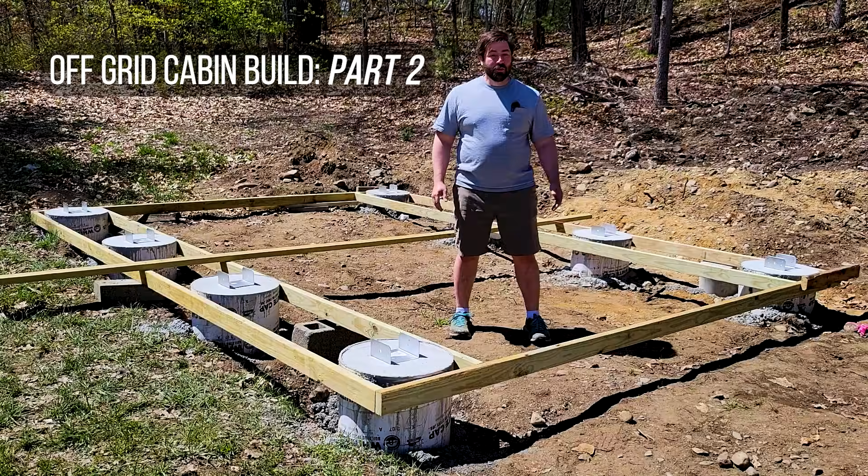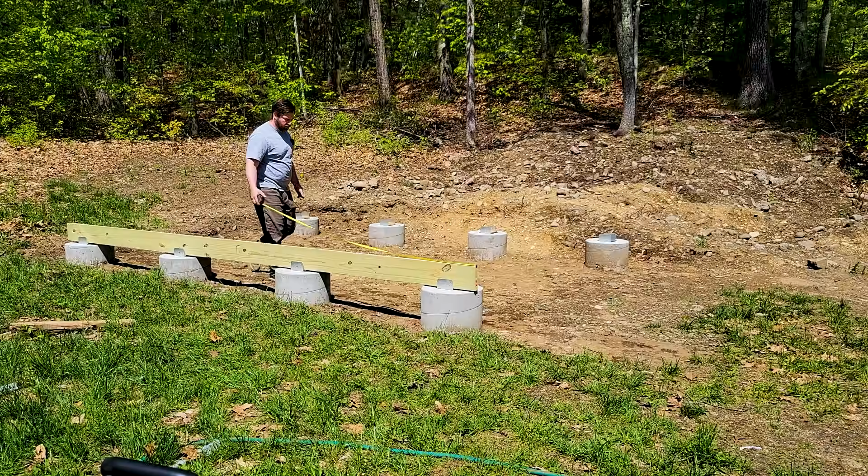Now, in this video, we're going to be talking about beams most importantly. Yes, we'll be stripping the forms, we'll do a little grading, but how do you size the beam to go from footer to footer and span that gap and spread the load between the footers from the weight of the structure? Well, we'll be getting into that in this video. Here we go.

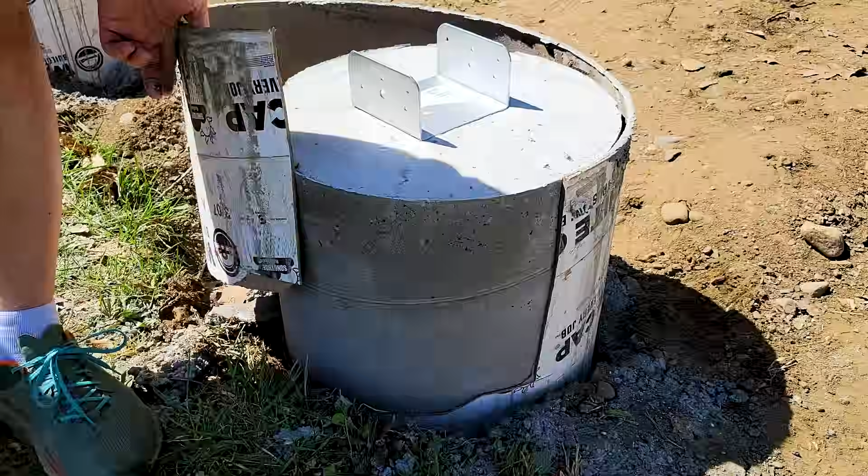First off, I need to strip all these wood forms. I use the wood forms to help me line up and secure the sonotubes while I poured the concrete. I didn't want anything shifting. Now I don't want to leave that sonotube in place, so I'm stripping it off. And then I need to round over the top edge of that so that hopefully I don't have big chunks of concrete breaking off in the future.

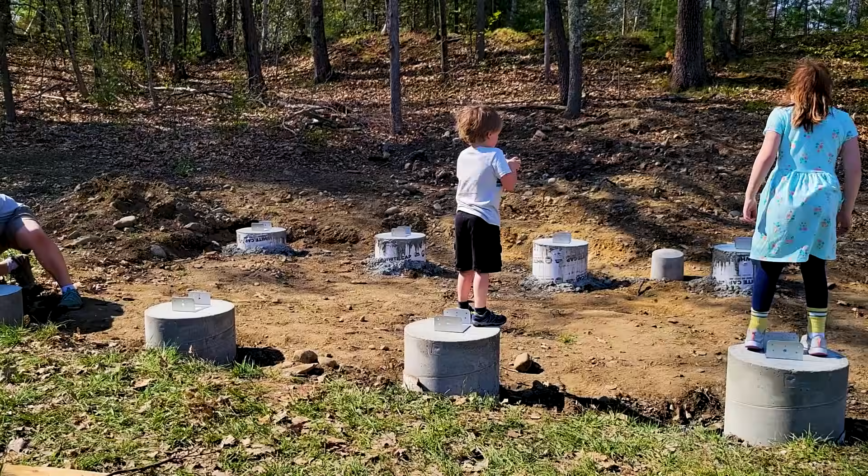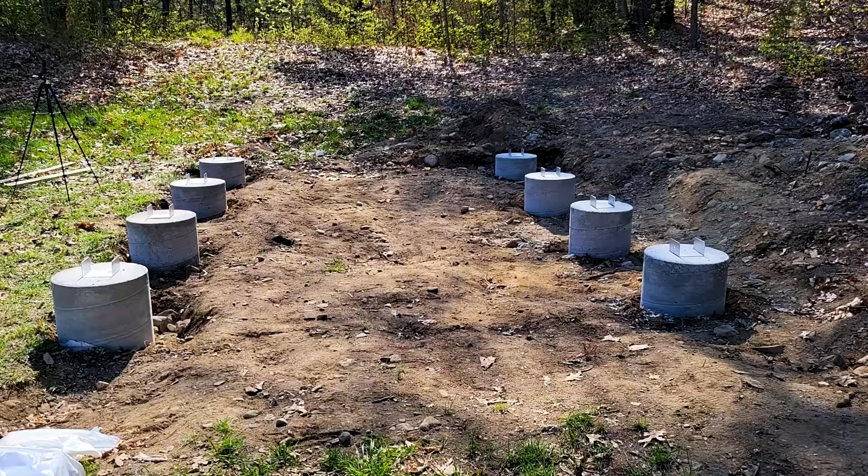And you can see my kids there helping me pick up the big chunks of concrete. I don't want to leave those behind. So I'm going to rent a dumpster at the end of this whole big project to throw all the debris away. And I was pretty satisfied with how the concrete anchors all lined up with each other.

Now my biggest concern with the dirt is that there were some low spots in between all the footers, and I don't want those collecting water over time or having any standing water under the cabin. So I'm spreading out a lot of dirt here. I'm removing the big rocks. At one point I grabbed a big iron bar and was ramming it down next to the concrete.

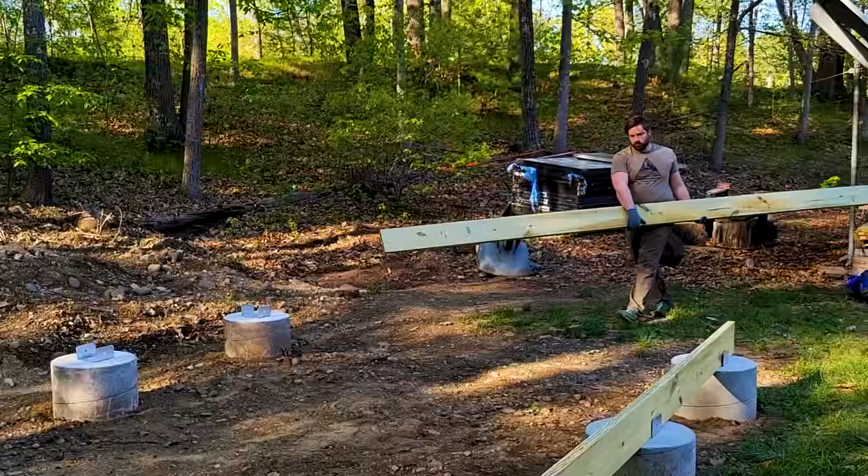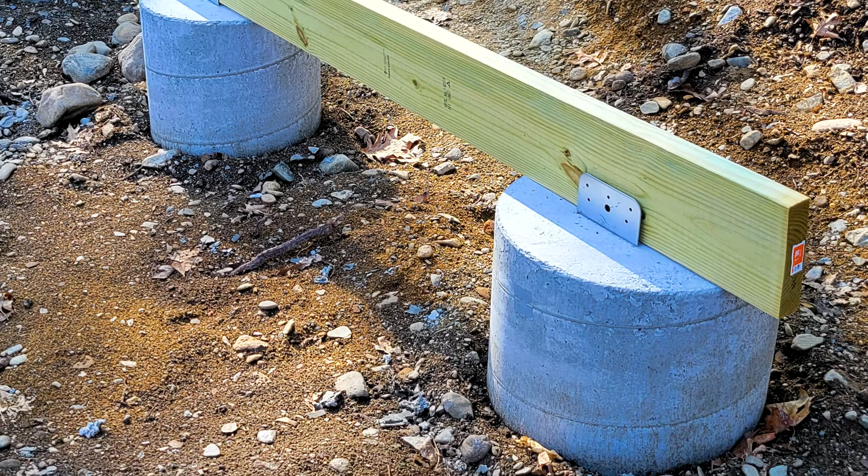Once I was satisfied with that, I got my very first look at how the beams would be positioned. I'm finally at a point where I want to move on to the beams. Now the beam needs to span from one support to the next and take the weight of the structure. Now from one support to the next support, the clear span, not center to center, but the clear span is about 4.33 lineal feet. Let's look at the code.

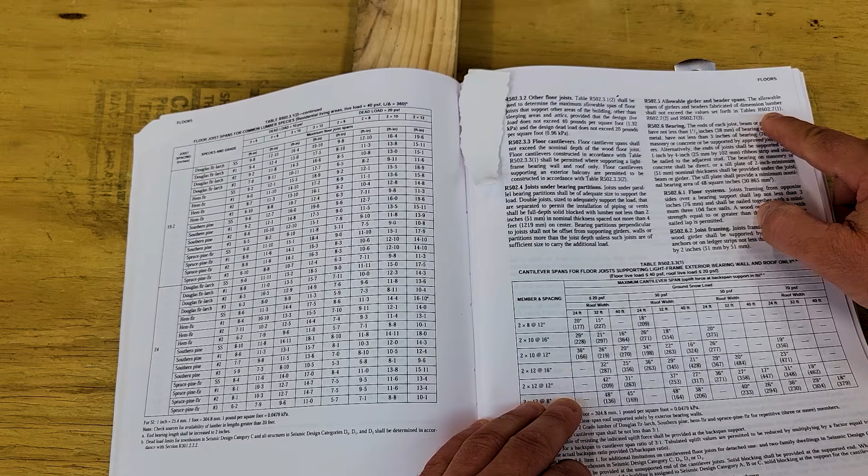First, we're going to look in the chapter for floors because this beam is supporting the floor joists. Now beams supporting floor joists have a special name called girder. And it says right here to refer to chapter 6, specifically tables R602.7. So let's go over here, and that's these tables. And so these can be used for headers in a wall or floor girders for supporting floor joists.

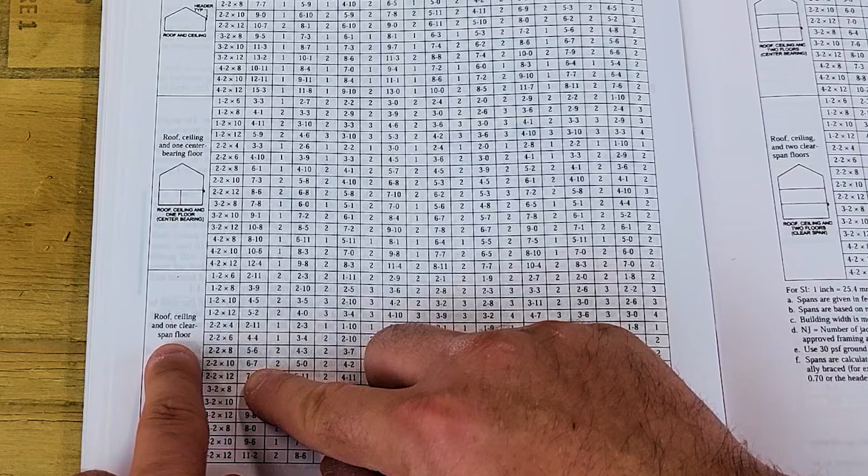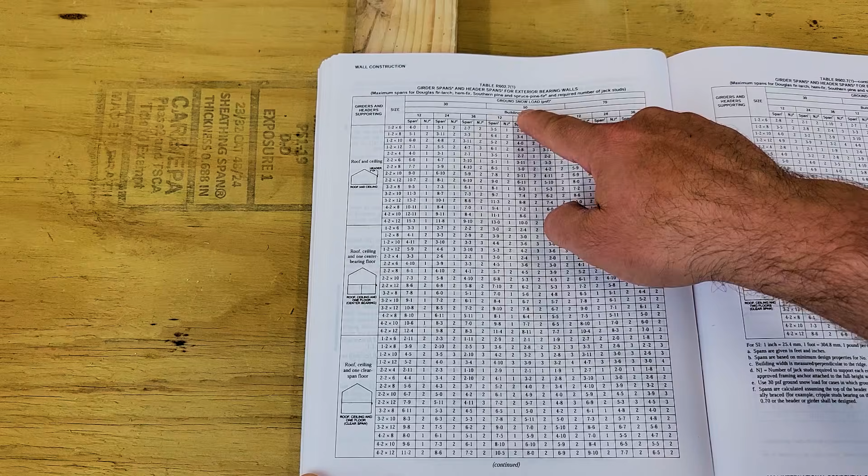On this side, we can see that this represents our situation. It's saying that this girder is going to support a roof, a ceiling, and one clear span floor. Well, that's our situation. At the top, we can see it's broken into 3 big columns based on ground snow load. That's 30 pounds, 50 pounds, and 70 pounds. In my area, it's 40 pound per square foot snow load, but we'll have to bump up and use the 50 pound because there's no 40 pound reference.

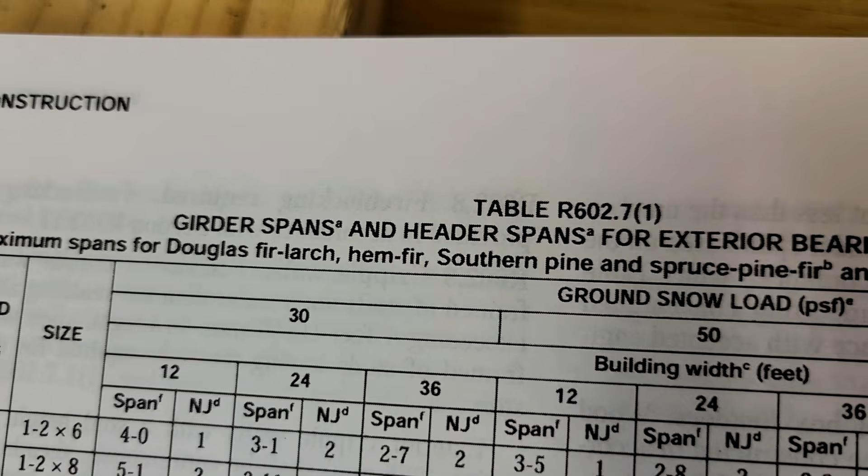Then it says building width. Well, my building is 12 feet and there actually is a 12-foot column. So we're going to use that. Well, it says here span and number of jack studs. Well, we're not actually having jack studs, so all we care about is the span. So we're going to look at this column right next to the ruler. Let's zoom in and get really close here.

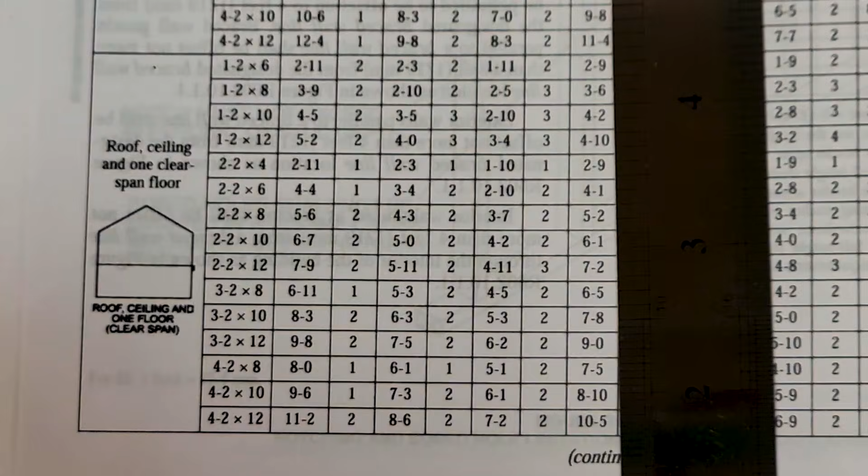The clear span that I have is about 4 feet and 4 inches. So we're going to look in this column here for anything over 4 feet, 4 inches. So you can see a single 2x10 is not strong enough. A single 2x12 is strong enough. It can span it. But that would be really, really tippy. So we keep going down the line.

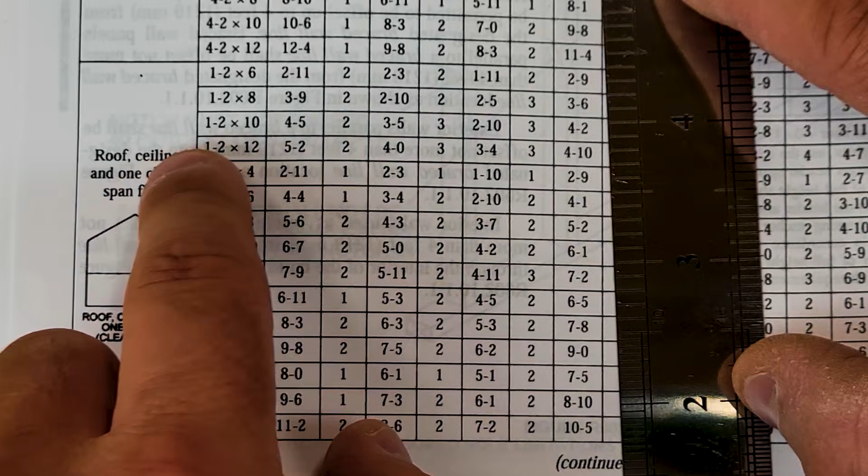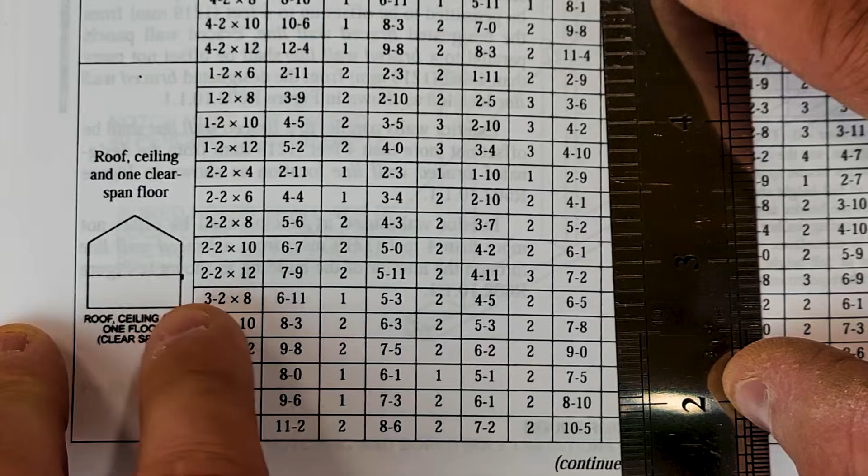And we can see that we could use a double 2x8. But again, I want to fatten that up. So if we go to a triple 2x8 right here, it can span 6 foot 5 inches. So we got plenty of strength. We have plenty of stiffness, so we're not going to have a bouncy floor. And we also have a very stable girder in this case that won't want to tip over.

Now before I can go and nail the beams together, I have to check for level between each footer. Now we did that while we poured the concrete, but things always move a little bit and they're never perfect. So this is my chance to add little shims as needed. So I have a 16-foot long 2x8 pressure treated on both sides.

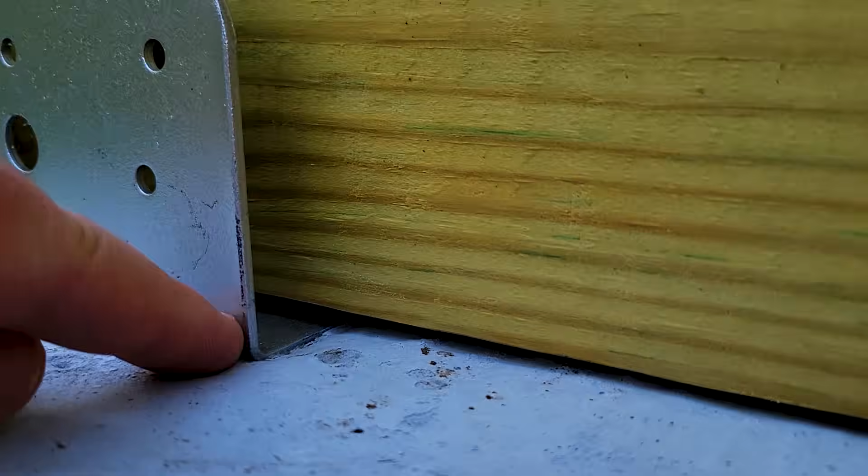And what's interesting is I can see that, for example, this one has contact, but over here, it's still loose. It's not touching that footer. It's nice and straight. And down here, we're not touching the metal. So this thing is actually free floating. It's not touching this footer anywhere, but it is touching this footer. So what I'm going to use in this situation is an asphalt shingle.

I'm going to cut a piece of asphalt shingle as my shim, and I'm actually going to put a piece under all of them, but I'm going to put 2 under this one and 1 here where we already had contact, 2 under this guy, and 1 over here on the far end.

Now that asphalt shingle, it's going to last a very long time. I have been on renovation projects where these things are probably 60 plus years old and still holding up just fine because, you know, they're not exposed to the weather. They're hidden underneath here. If you guys have a better idea of what could be used for a shim in a situation like this, I'm all for it, but that's what I'm going to use.

And I'm using a straight blade here. With asphalt shingles, you really want to use a curved blade, but I'm making do with what I have. So we're talking 5.5 inches, because that's how wide it is. There you go. So that's 1 shim.

There we go. So it looks like it's still not bearing weight, but I can hear it scraping the granulars. So that's the process of going down. That's just 2 shims down, but I'll keep cutting some and adding some to the other side, and we'll see if we can't get this whole thing so that we have some touching going on all the bearing surfaces.

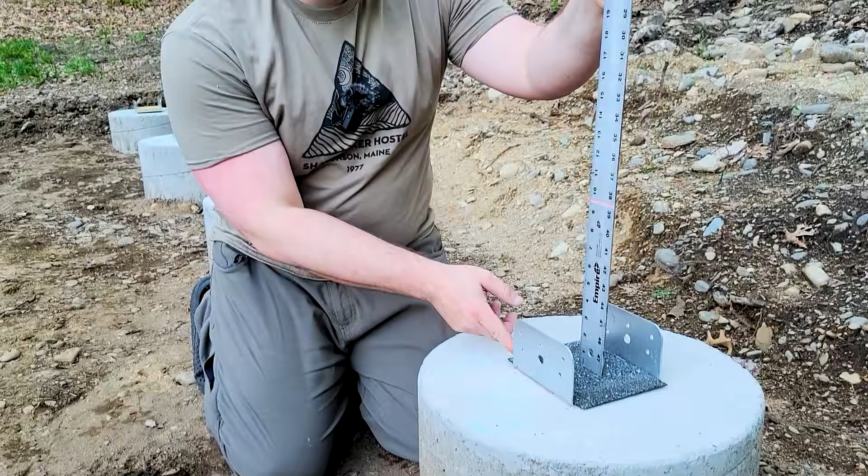But let's go around. I've got them all now shimmed where I think it's as close as I can. I was going for within 1/8 of an inch. This spot right here is showing at 9.5. And I've got 1 shingle in there as my shim. So I was writing down the heights in chalk on the foundation of each one so I could figure out how many shims I need. And you'll see some of them I had to go more than just a single piece of asphalt. So we're looking for 9.5 on the ruler.

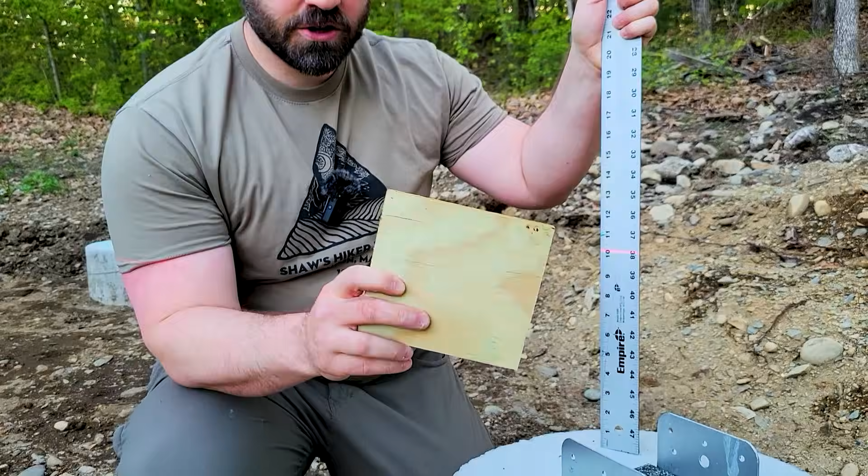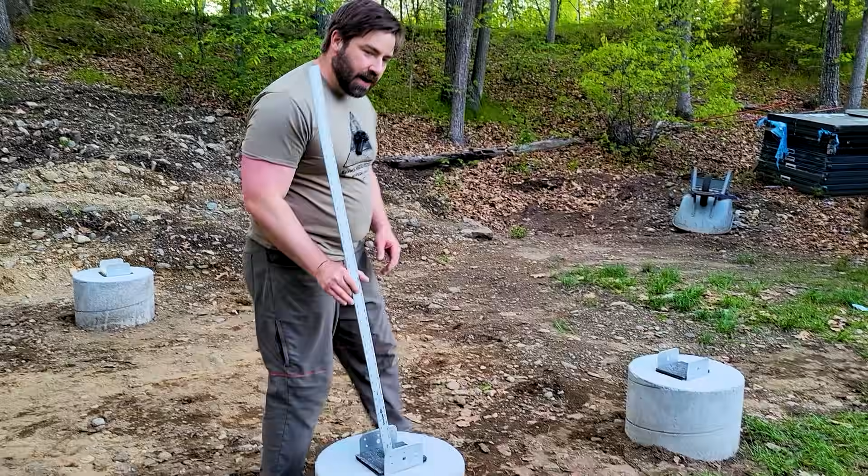Now, as you can see over here, I added a piece of 1/2 inch pressure treated plywood, and that's on top of the asphalt shingle. And now we have 9.5 inches on the ruler. But now I've got the same height on the ruler all the way around. So these are now all level. And tomorrow we'll put the beams in, the 2x8s, and actually make the beams.

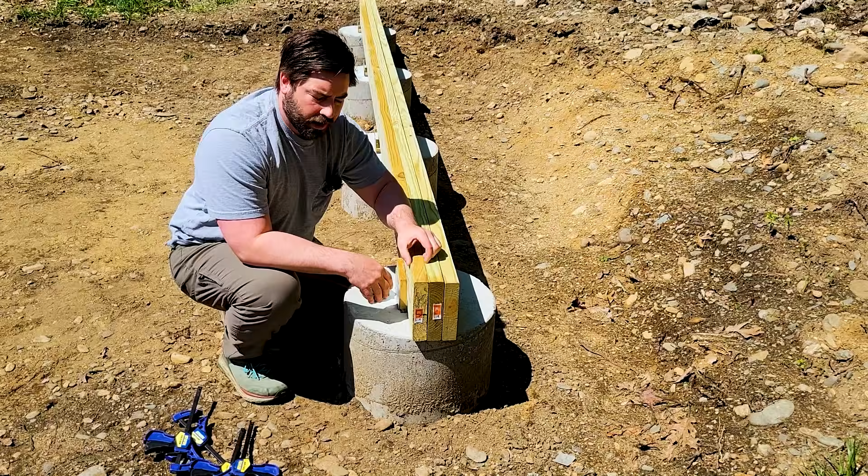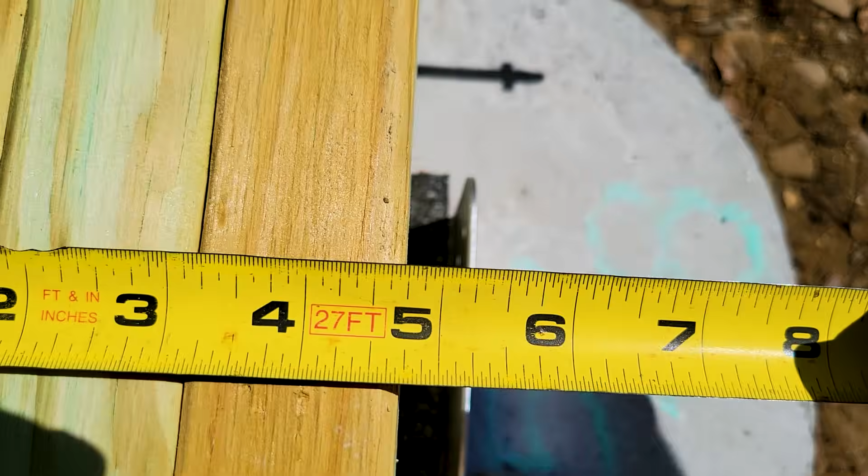Standard 2x lumber is 1.5 inches thick. So in a perfect world, this would be 4.5 inches. However, we're a little bit more than that. We're 4 3/4. And that's because pressure treated lumber comes typically wet. And so the thing is that I can't get 2 1/2 inch spacers in here, which is pretty common. So this is just a scrap of 3/4 inch, and it goes in there pretty snug. So I'm gonna cut some 3/4 inch spacers.

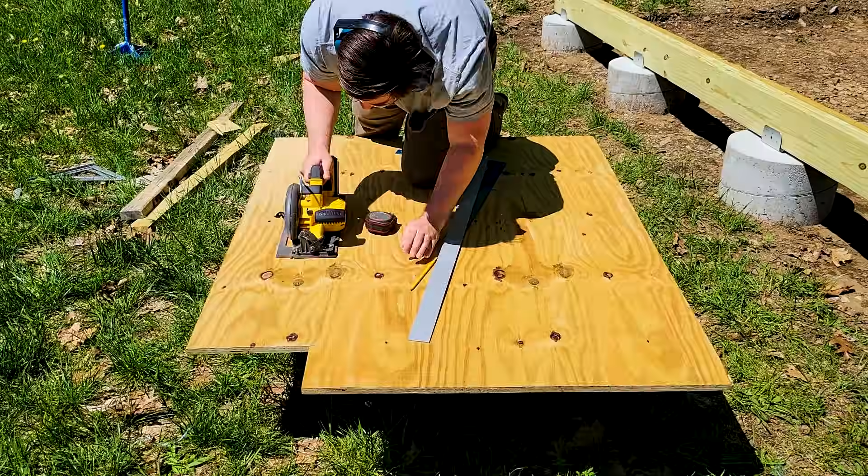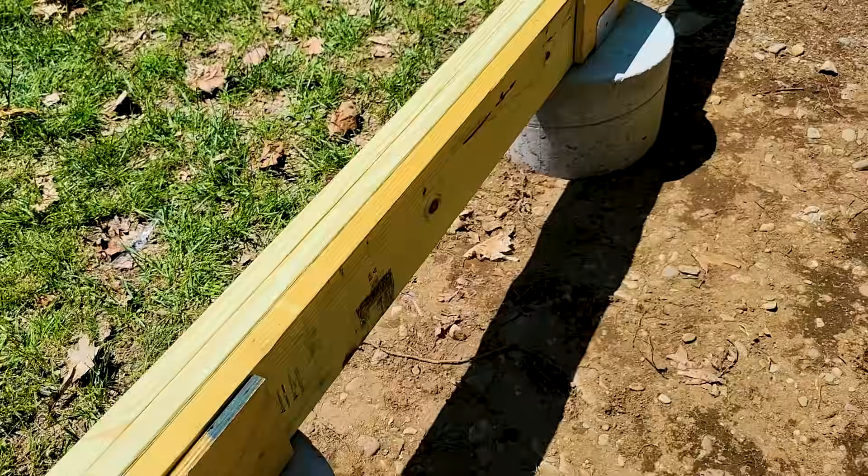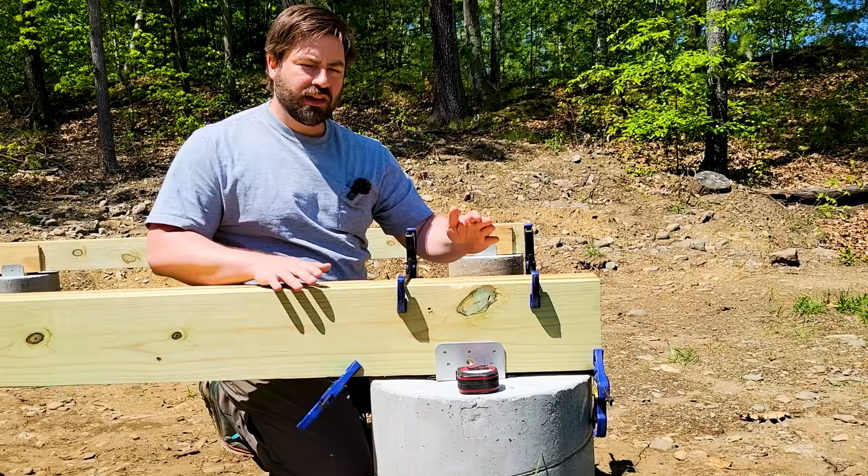So these are 2x8 by 16 foot, but they don't always come 16 feet long. In fact, all 3 of them are a little bit longer. So I'm gonna trim them all down so they're flush. The 3 2x8s are on here, and they need to act as 1 beam. So to do that, we need to fasten it together. Now there is gonna be a nailing schedule that I'll do, but first I'm gonna bolt it together to make sure that all the plies are tight and we don't have gaps.

So I'm going to use this product instead of, say, carriage bolts, or you could use regular bolts with nuts and washers. This is just quicker and easier. So it's a 2-part system. You have your long screw on one side and you have a nut on the other, and they tighten onto themselves. So hopefully this works out well. I've used it before and I like these.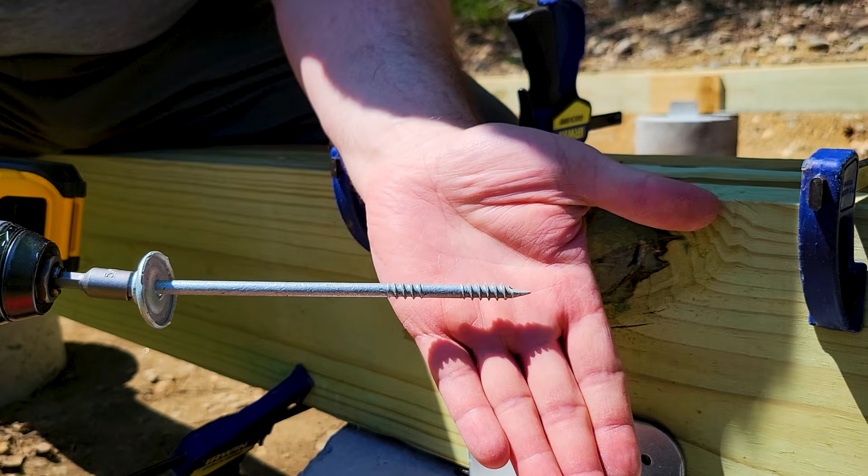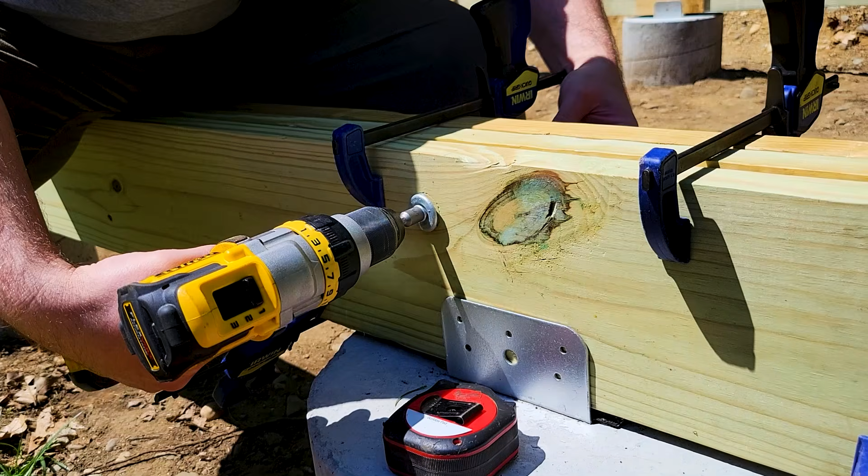So inside the box there's a bag with some extra washers, but it also comes with a 5/16 nut driver. So these have a pointy tip on them, so we don't have to pre-drill. I did play around with this already, so that's why there's a hole there, but once I see the tip coming out on the other side, I'm going to take the nut, I'm going to thread it on as far as it'll go, and then it'll self-tighten.

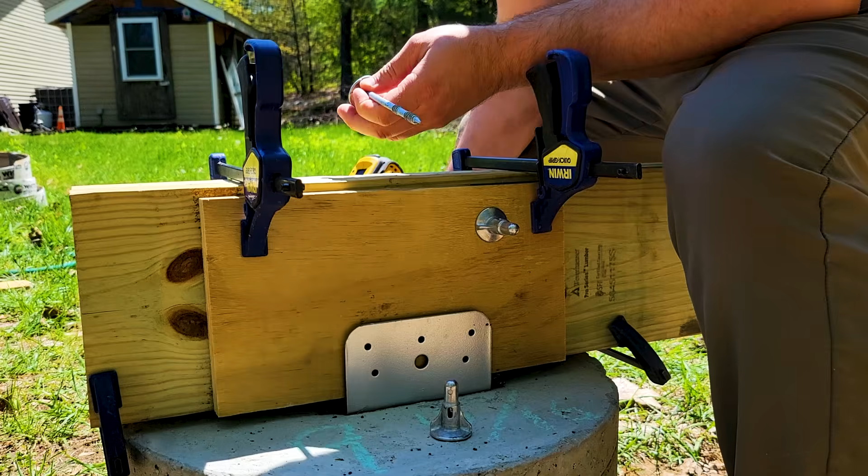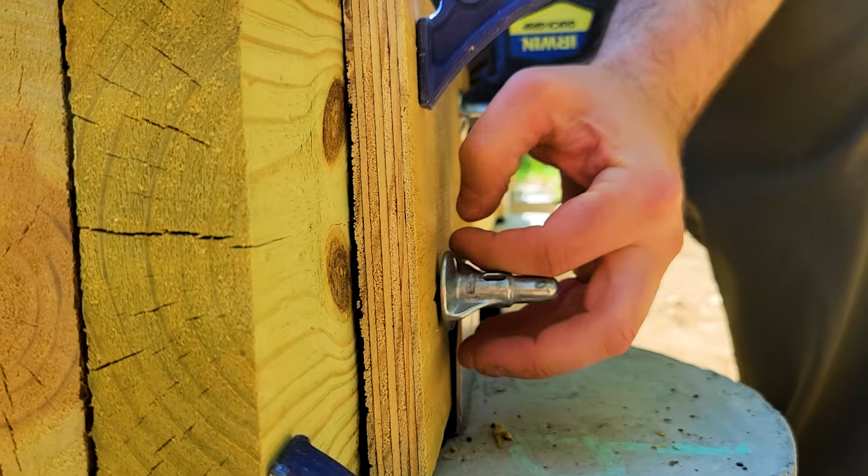See, it just kind of sinks that in there nice and tight. Okay, so I'm going to drive this in on the other side now. Go, see the tip coming out. So I'm just going to thread this on. So you see there's just a little bit of threads coming out right now. So I'm going to thread it on. And just by hand, I'm getting it tight, and then there's little teeth on there that will bind and hold it.

So that's the process. I figure I'll put 2 of these in at each bearing point, and then I'll go back in and fill in with nails. Now, pneumatic nails shoot so fast that they don't do a good job of clamping the plies together. So you could screw the plies together, you could use a regular carriage bolt. There's a few different methods of doing that, but the point is you need the plies together, and then you can shoot it with the fasteners.

Alternatively, you could use common nails and sink them with a hammer, and that helps cinch it together. But I don't think it does as good of a job as using something like the ThruLOK that goes all the way through and kind of has that fastener on both sides. These are 10-penny nails for my pneumatic nail gun, and they are galvanized. It's very important to use fasteners approved for pressure-treated lumber. So in this case, galvanized is approved for it.

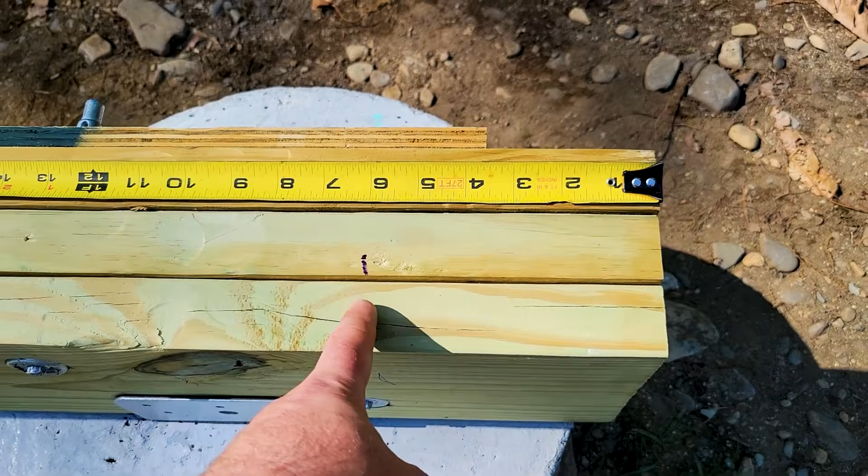So we're gonna go through and fasten this. Now the fastening schedule is important. You need to go every 1 foot on center, alternating sides. So I'm gonna bring you in close so that we can see that. Usually you just eyeball it, but I will mark it out for everybody to see on camera. The nailing schedule is every 1 foot on center, alternating sides. So I made a mark at 6 inches in, and then every 1 foot on center after that. So let's see how that works.

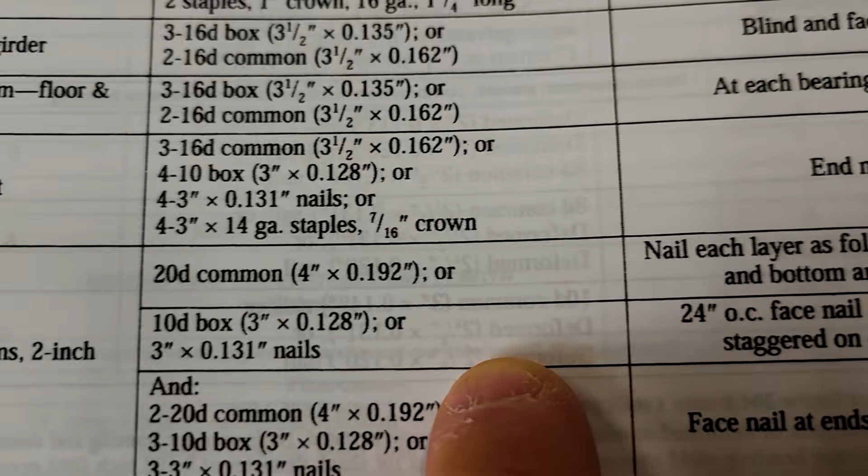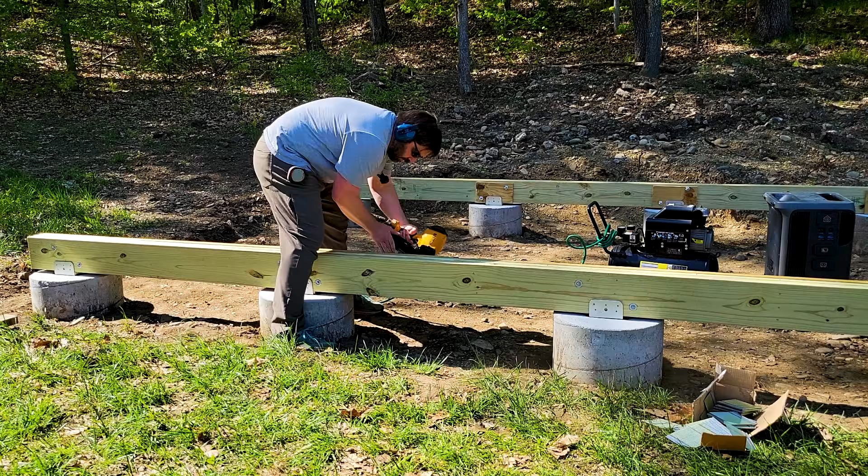Okay, so now 1 foot on center is right here. 3, and now this is the 2 foot mark. And wherever there's a proud nail, we're gonna go sink it. So now it's fully fastened, acting as one. And I'm just gonna do it on the other beam as well.

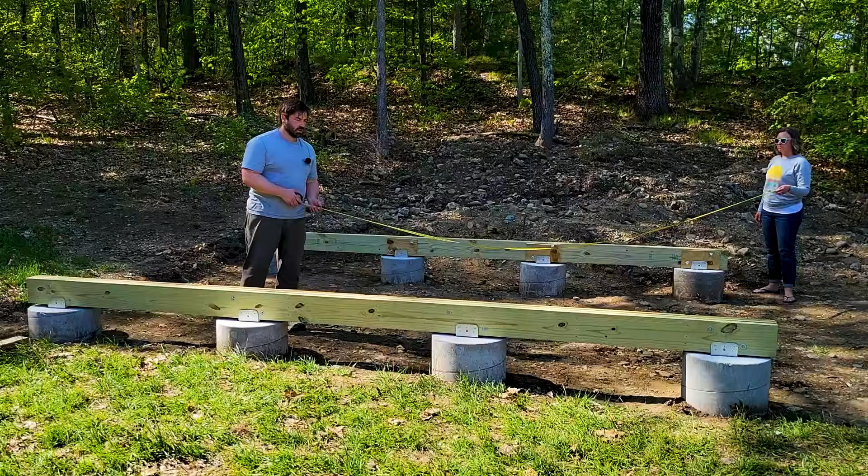So the beams are fastened together and they're acting as one, but we don't know if they're square yet. I know they're the same length. Just hook it on the very outside edge, please. And I'm measuring to the outside edge over here, 232 3/4, 233 1/4, okay? So we're 1/2 an inch off, which means we need to move it 1/4 of an inch. So we'll do that. All right, so we got 233 on the nose. Let's jump over to the other side, and 233 on the nose.

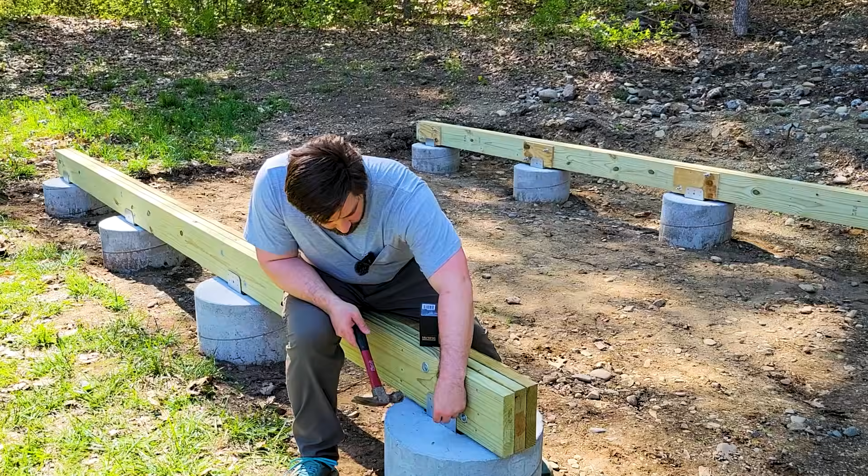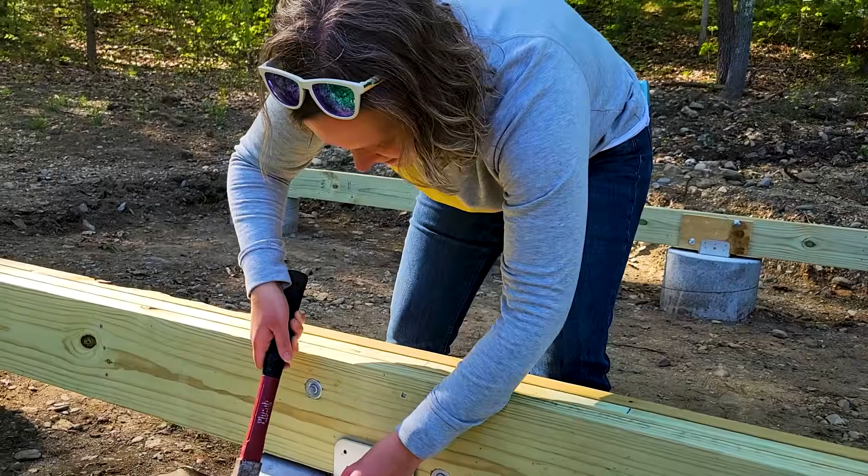So we've got the 2 beams perfectly square, and now we can fasten them to the foundation. And yeah, they won't move anymore. So I'm gonna put them in. They're hot dipped galvanized again, because that's what we have to use with pressure treated. All right, now you can see it helped with the nails. The beams are now fully fastened to the concrete anchors, and at this point you would normally be done.

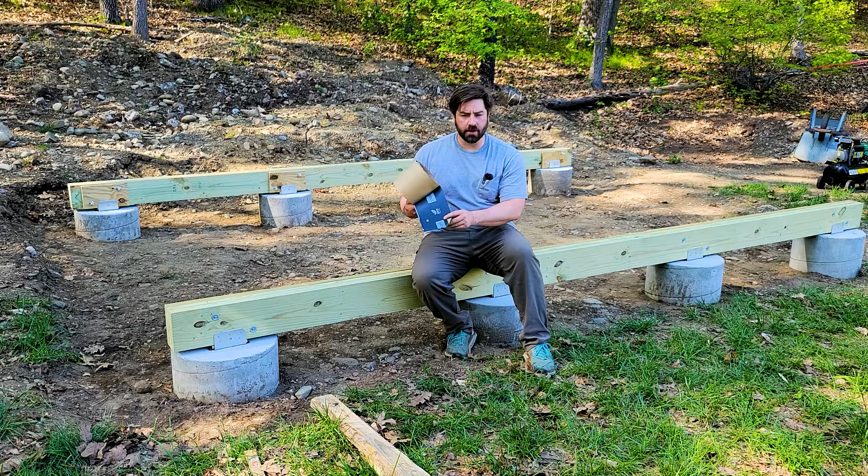I'm going to go one little step further, simply because we have a lot of rain coming up in the next week before I get the framing on, and I'd rather not water get down in here and swell. So what I'm going to do is use a piece of flashing tape. In this case, it's just Grace Vycor, but it could be any flashing tape. I'm just going to roll it on top, and that way when it rains, it's not going to get down in between the plies. So just a little precaution against the beam kind of warping or swelling over the course of the next few weeks or months while I build the rest of the frame on top of it.

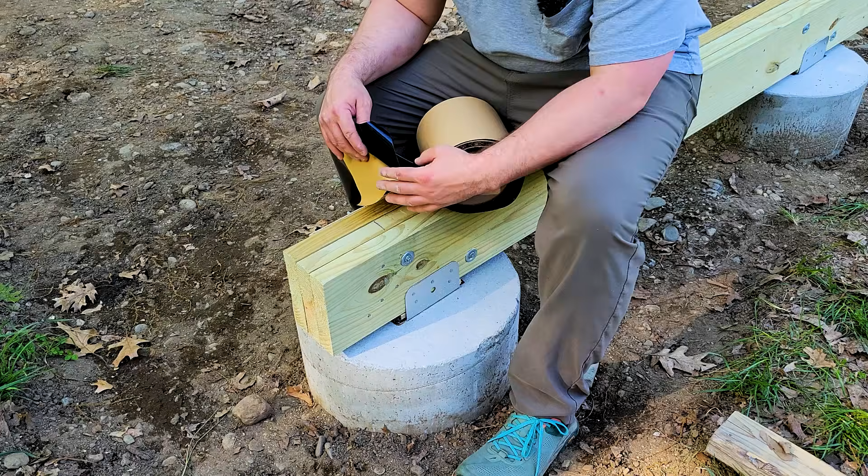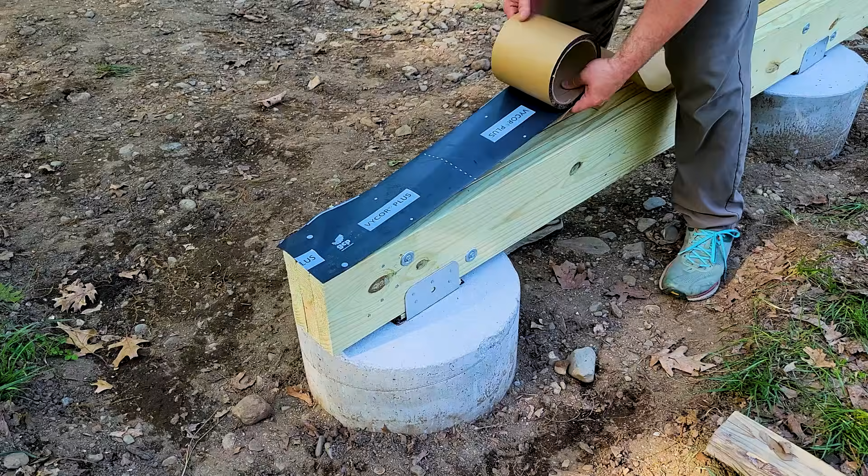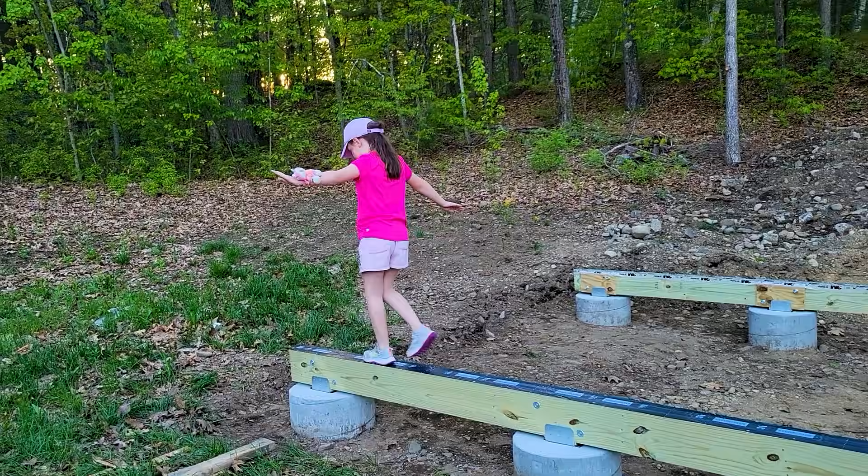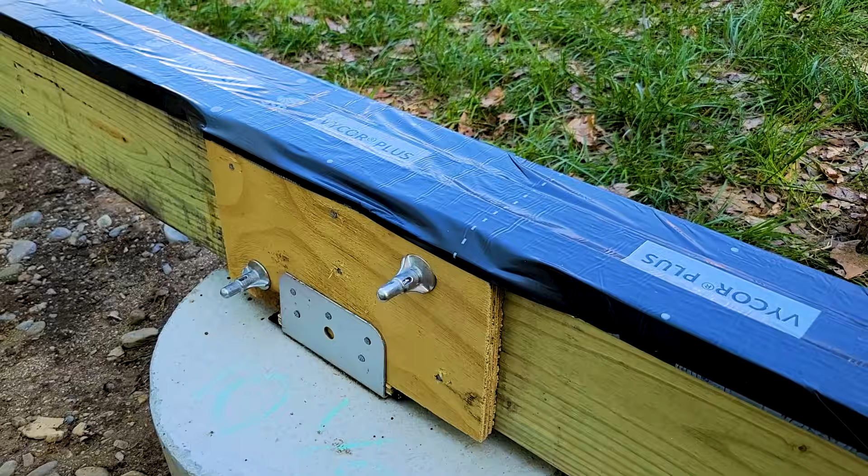And I don't want it to look bad on this face because that will be seen as you walk up. So I'm gonna err on the side of going towards the middle. We're just gonna line it up. This is a J roller. And I'm just lining it up with that edge. Well, I ran out of Vycor, so I'm switching over to some 3M all-weather flashing tape. Again, just something that I have on hand.

Well, there we go, everybody. The beams are secured, they're fastened together, they're level not only across the length, but also level to one another, and they are square to one another. I have confidence now that when I build the wood frame on top of this, it's going to go smoothly and easily, much more so than if I hadn't taken the care in this stage.